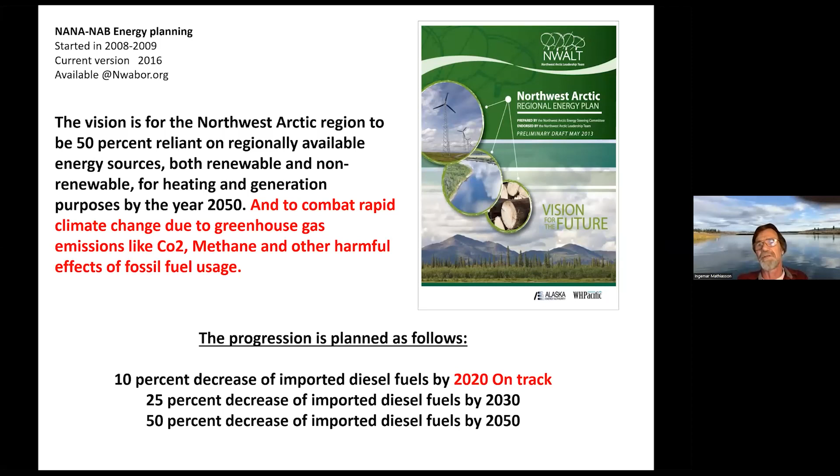The Northwest Arctic has decided that we needed, since 2008, to start developing all available energy sources that are local, both renewable and non-renewable. We're looking at both, and definitely goes towards renewables, as we also added to combat the rapid climate change and greenhouse gas emissions since about 2016, when we changed the plan slightly. So we've been doing about 10% decrease of imported diesels, and is on track now for possibly 25% by 2030, aiming for 50% by 2050.

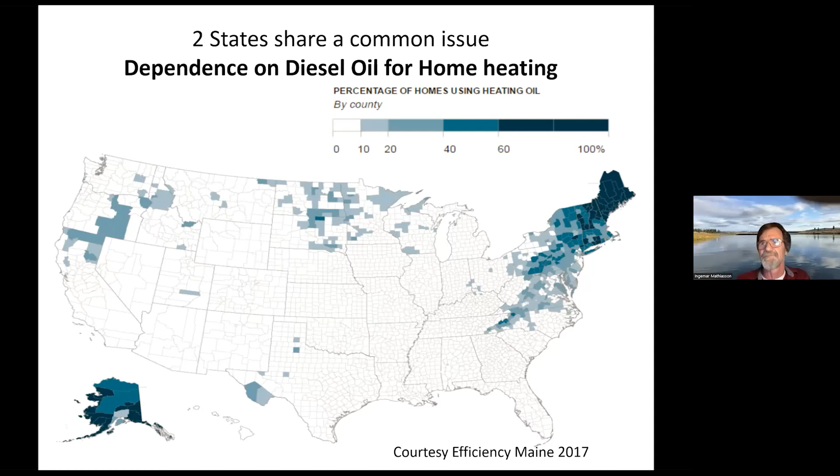Alternate energy harvest time is available. Since we started our solar arrays up in the Arctic, we found that the heat pump harvest time is the same as the solar harvest time. In the Arctic, we harvest when the energy is there—caribou, berries, energy, wind—we go after it as a harvest season. And that's how we started our solar arrays.

We realized we could do 3 or 4 or 5 months in the year, so why not do it and see what the impact would be? So the harvest season for heat pumps is the same. Above zero, they have a fairly high, decent COP, but below zero, there are very few heat pumps that work effectively. So implementing heat pumps above zero during the harvest time was what we were aiming for—up to 6 months a year, can we use heat pumps?

So we looked at different numbers. The COPs to even break even for diesel displacement were approximately 2.4, 2.4, 2.3 for different kinds of equipment versus a heat pump. This is also dependent on the fuel cost being the same when you look at that COP, and it's not the same. For households, it's much more expensive to heat their house than it is to produce the electricity, so that makes a big difference when we're running the heat pump calculators.

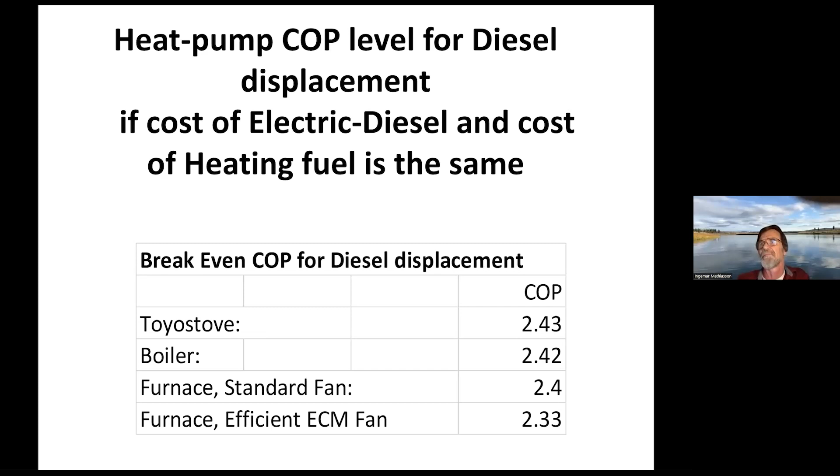Over in Maine, back in 2016-17, we had already seen that they were doing really well implementing heat pumps everywhere, even down to 27 below in some cases. They are not that different from Alaska, so we knew that what they were doing looked good.

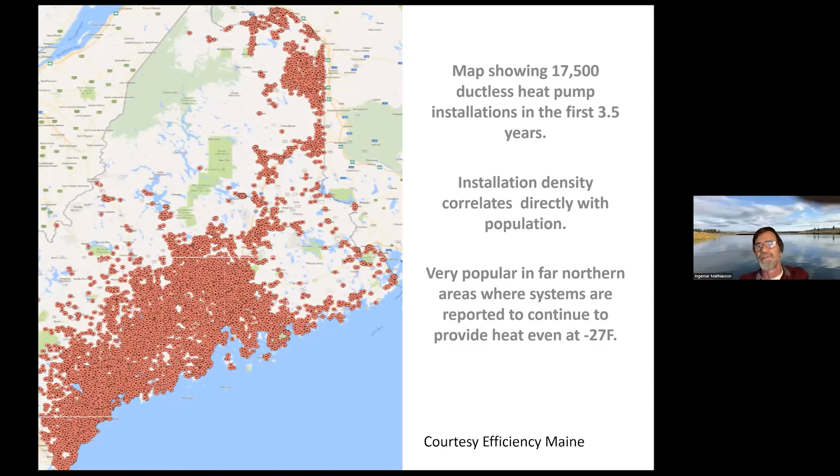We looked at the advantages: low-cost heat, similar to heating with natural gas or wood, typically half the cost of heating with oil, kerosene, electric baseboard, or propane. To compare heating costs of different heating systems—low-cost air conditioning, of course.

Up in Shungnak, when we put up a heat pump, somebody accused me of giving air conditioning to the Eskimos. Well, everybody liked it, actually. The summer gets pretty hot up in Shungnak, so that was an added bonus.

And the comfort of having heat pumps and safety—air quality in particular gets a whole lot better if you are supplementing with biomass wood. The filters in the heat pumps can be set just to circulate the air and filter it if the heat pump is not used for anything else, getting cleaner air inside the house when people are using wood stoves. And of course, no CO2 emissions if we can go on electricity generated by alternate energy.

So we did 13 installations in 2016.

There was some advantage to having heat pumps, like a guy up in Kiana decided. He put a little cooling tent outside once he figured out that he was cooling down the outside of his house. He put this up when he was hunting and sucked the heat out of the meat and heated his house with it, and got a nice little cooling effect at the same time.

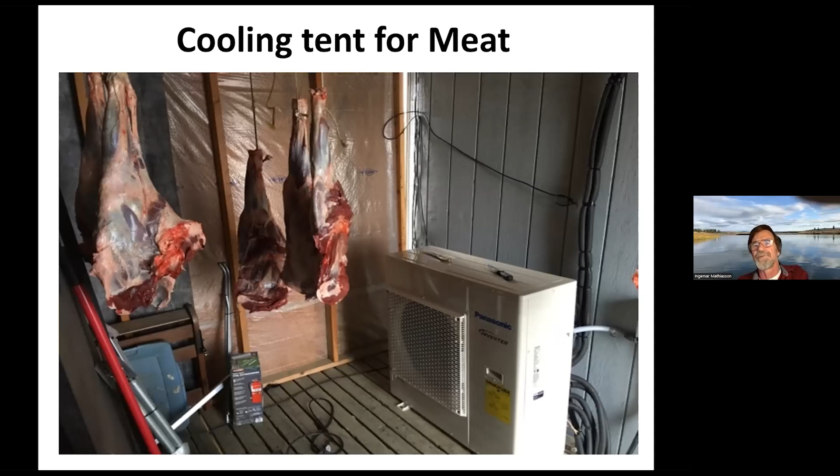Here's some results that are of interest. As somebody goes out of PCE, the actual cost is going to increase. This ends up being a blended rate. The stove oil here was $9.50 a gallon. October was heated by the equivalent of 11 gallons, but they've used 25 gallons to produce the same amount of kilowatt hours.

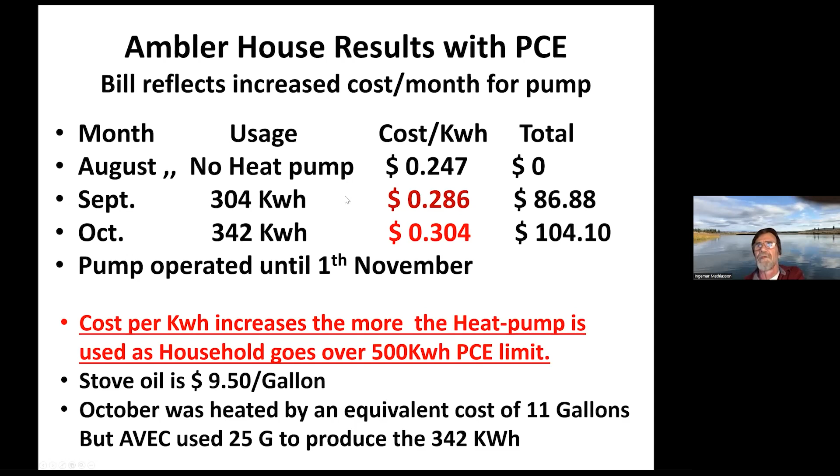So we looked at untapped PCE, what's available out there. In our region in 2016, we had about $1.1 million sitting there that wasn't used, and our community buildings was about 830,000. So we saw right away that there was enough to add some heat pumps in there, and they could effectively take care of that PCE and keep the rates somewhat decent, not too high for the households.

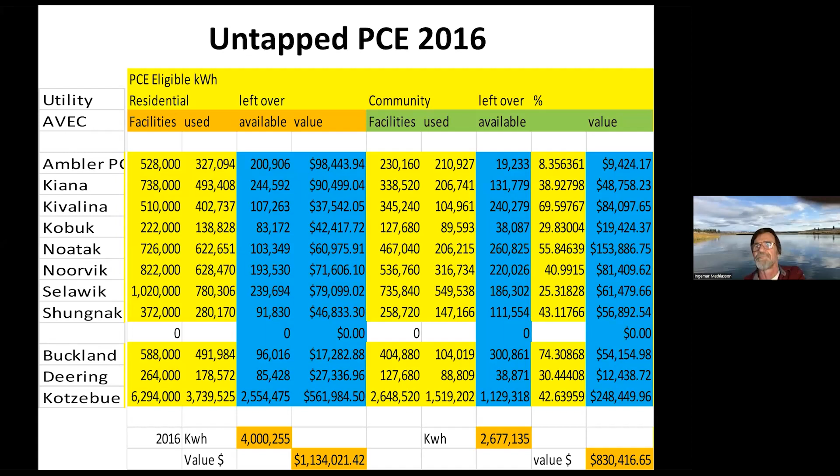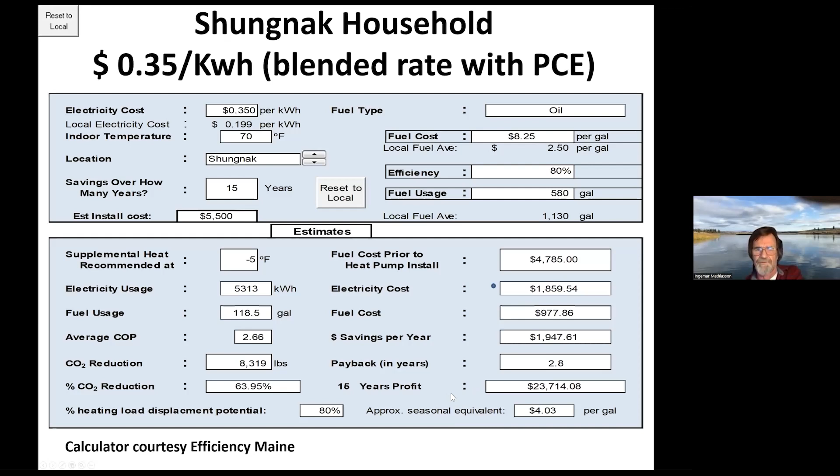The profit would be $23,000 after 15 years, with the blended 35-cent rate. So what happens with the full rate? At that time, the rate in Shungnak was 60 cents. So at that point they still had a saving of $838 a year, but it was getting closer to break even. Still a slight saving due to the high difference between the fuel cost of $8.25 at that time - now it's $10 up in Shungnak - and the actual cost for AVEC's generation of electricity.

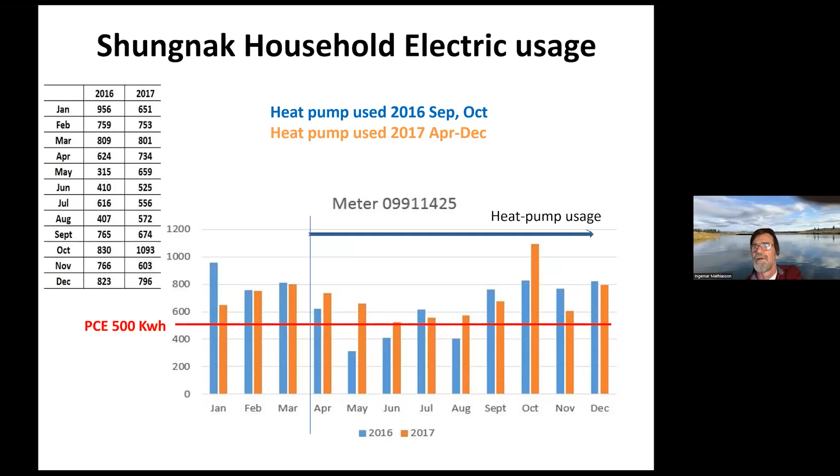The household electric, we just looked at where it's in use. We have the PCE line. 2017 is with the heat pumps, and the household uses more during shoulder months using the heat pump. However, looking at 3 years in a row - 2015, '16, '17 - what the household was using didn't change a whole lot. Between 2016 and '17, adding the heat pump as they were turning off other appliances didn't change the whole thing. Of course, there are environmental factors in all this - it's not a very accurate show of what's actually happening, but it doesn't increase the household's electricity use very much when they're switching from one appliance to another.

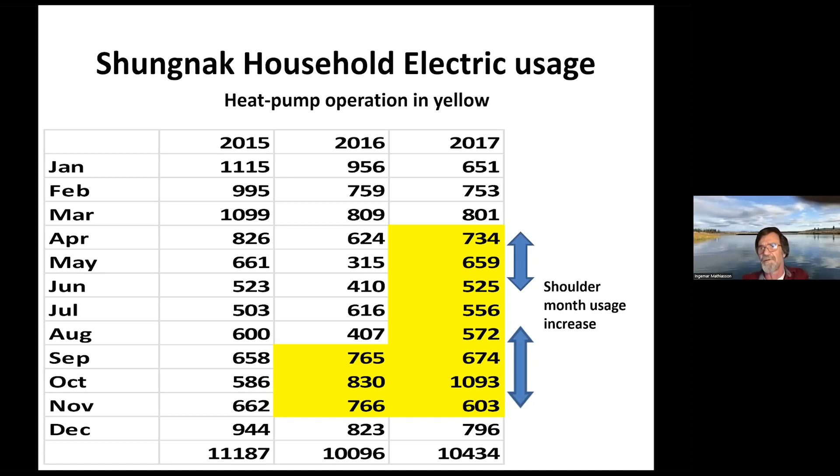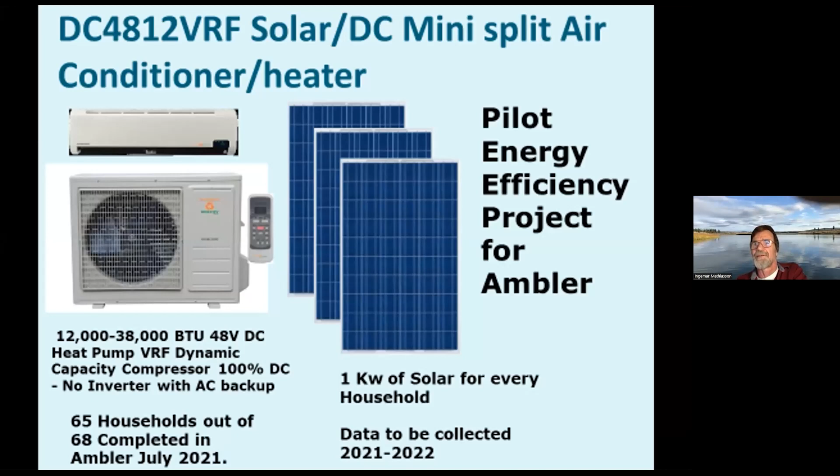With the solar powered heat pump, we have 68 households now running in Ambler with solar power, and they know when it gets nice and sunny out, they get this little green mark on it. They can run fully on solar and don't take anything from the grid for these additional heat pumps. We decided to do it this way as we knew that putting Mitsubishis in 68 households would strain the grid, so we wanted to try it and see how people like it. It's been very positive, people really like the pumps, and we'll collect data all year on it.

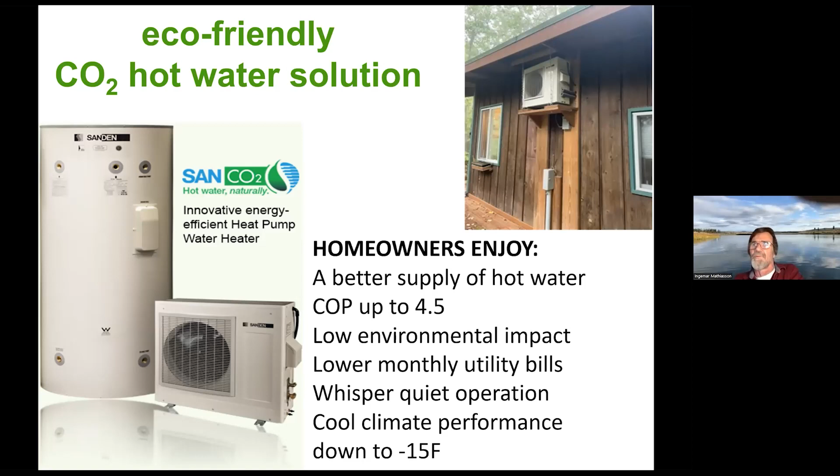This one I'm testing out in a couple of places. I'll go a little faster to get to the end. We have a hydroponic van up in Kotzebue that's powered by that together with solar, and they did really well through January of 2020.

To that, we've added the Shungnak solar power IPP up in Shungnak, and they now go diesel-off almost every day between 4 and 7 hours, probably up to 10 when it's available. During the summer, and for the next 4 or 5 months, they'd be a perfect candidate to add Mitsubishi heat pumps to the community, running off that alternate energy and offsetting even more diesel fuel during those 6 months when the solar is running.

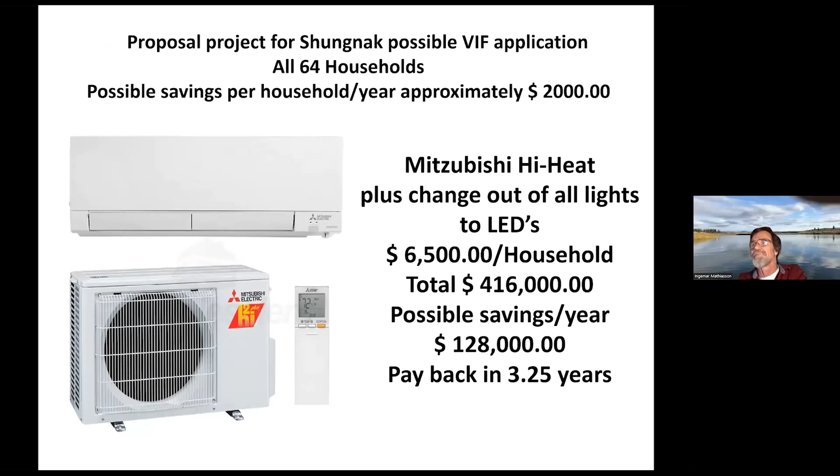So I know I've gone a little over, so I'll finish with the last one here: it's not the strongest that survives, it's the one that is most adaptable to change that survives. So that's what I got.

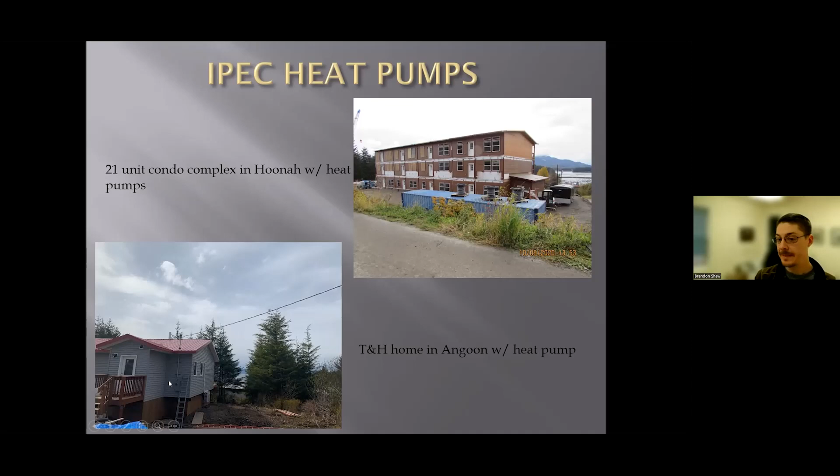A little background: IPEC's generation is currently a mix of run-of-river hydro as well as diesel generation. Due to the islanded nature of IPEC's communities and the variability of our hydro resources, IPEC was initially concerned about being prepared for peak loads and the demands heat pumps would place on the system during the coldest days of winter, which is also likely when hydro production is very low. During these times, load is likely served nearly 100% by diesel generation, and we do not want loading issues on these islanded systems.

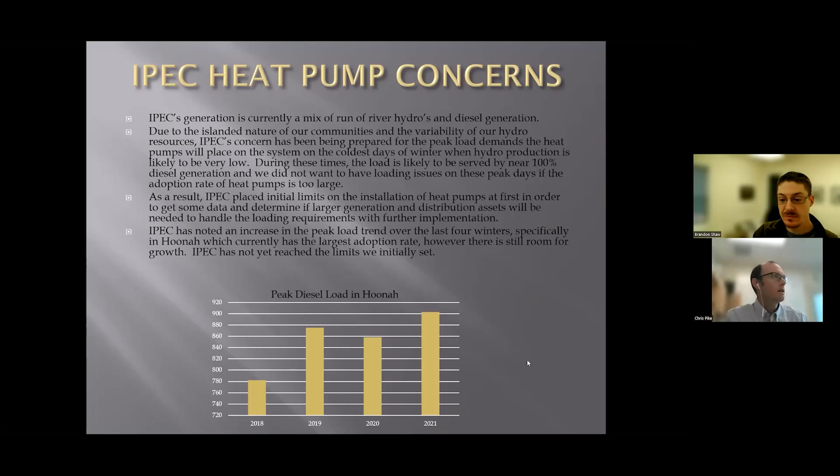Do the homes in the communities where heat pumps have been installed typically maintain a backup fuel source, or how does that work? Typically, they are maintaining some sort of backup heating source. In some cases it's resistive electric heat, which, as we've discussed earlier, is not always the most efficient. There's still a lot of wood heat use in our communities here in Southeast, so it's a combination of wood heat. I'm not aware of anybody running backup monitor oil heaters or anything in these new installations. We're trying to get away from that—at least TNH is kind of pushing to get away from that.

And have most of the heat pumps been installed in new construction, or have people retrofitted older buildings as well? There has been some retrofits, again spearheaded by TNH Housing, but they have retrofitted some. Okay, and so those older buildings would typically have the wood stoves and that kind of thing they would use for backup heat? Yep.

Can you talk a little bit about how you guys determined how many heat pumps you wanted to start with as that upper level boundary in each village? How is that number determined? We worked closely with Michelle and ACEP to look at what our peak loads were in each of the communities and what our capacity was for generation in the communities, and what kind of wiggle room we had in between. We set a number, and the number is different for each community—higher in some, lower in others. But we have a ways to go before we reach our peak in any of the communities, so we're looking forward to bringing more heat pumps on.

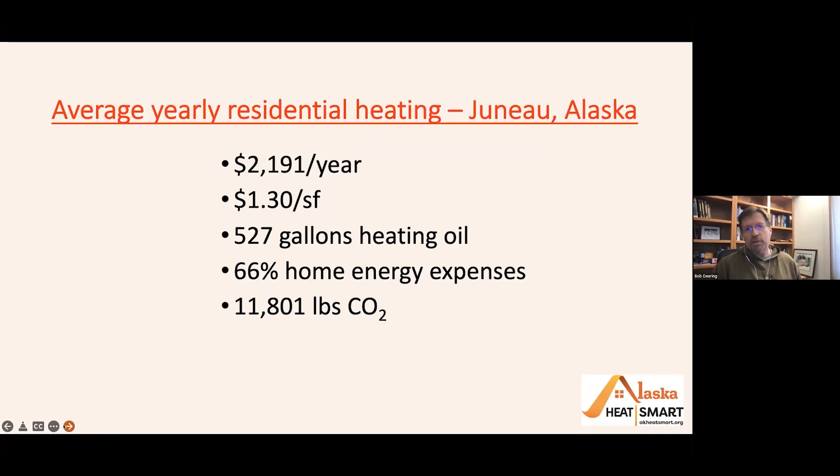That's what average yearly residential heating looks like in Juneau for the average house, and these are the numbers we're trying to drive down with our work. Like Chris said, we're trying to transform residential heating at a community scale. We're not a research organization, we're not trying to be on the bleeding edge of any technology. Our real focus is trying to do standard heat pump technology at the greatest number of houses in Juneau that we can.

A little bit about Juneau. Looks like my lettering, my words are covered up by our video.

The population here is about 32,000, except when the cruise ships are in, then it's about 52,000. We're the capital of Alaska.

Juneau's not accessible by the road system. You can fly in here, you can take water. Don't try driving, that won't help.

We're 100% hydropower, and we're really blessed with that. Our electric utility rate's about 12 cents a kilowatt hour in the winter, and we've got a lot of capacity for growth, so as we electrify Juneau, our utility can keep up with things.

We do not have natural gas. We don't have coal. We're looking at mostly heating oil and electricity, some wood heating.

We're considered Northern Maritime Pacific climate. Temperatures are in the 20s to 30s, typically in the winter. So we're really mild by other Alaska standards.

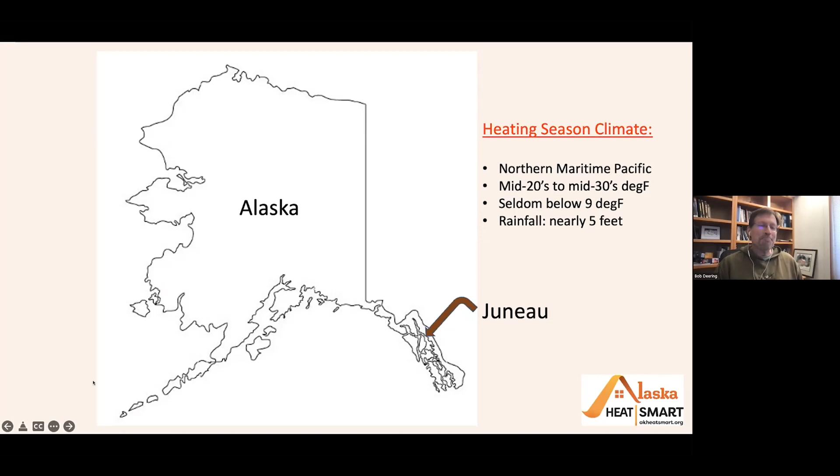Alaska's a big place. Our area of focus is pretty much on residential heating, single family housing. Mostly we're talking about existing stock, and we're retrofitting houses.

There's a lot of heat pumps going into new housing, but that's not really the focus of Alaska Heat Smart. We're working with folks to retrofit their houses. So far, we've worked with about 500 households in Juneau.

Profile on our houses, most of them are built before 1990 — there was a big boom in houses when the Alaska pipeline came in and all that money came into Juneau. What we're looking at is about 10,000 units, and that's single family housing, anything from mobile homes to some townhouses and condos included in that number.

The efficiency in Juneau houses is not generally that great. New houses with new building standards are much better, and we can see that in the data as we look at energy usage. But overall, it's pretty moderate.

The old houses in Juneau, the historic ones built in 1915, unless they've had a bunch of retrofit work on energy efficiency, are leaky houses that probably don't have any insulation. They really eat the energy.

It's mostly heating oil, like I mentioned earlier, hydronic boilers or forced air furnaces. Some people are putting in little Toyo stoves too, which are unit heaters — I'm assuming most people are familiar with those.

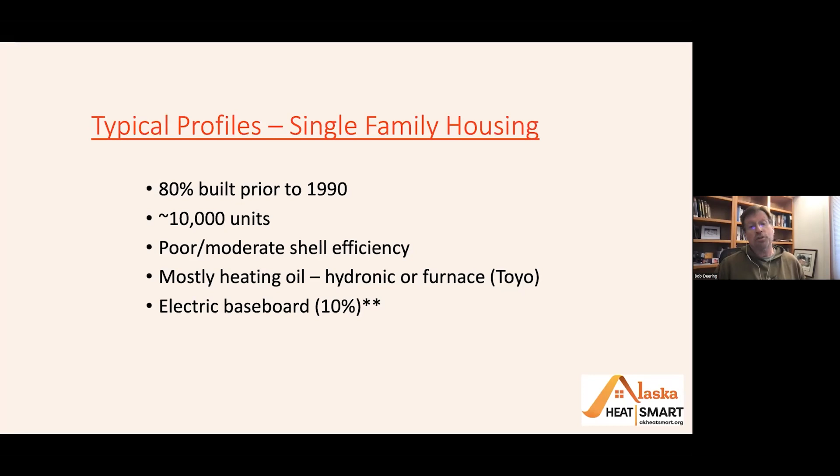These units are compatible with our climate. They're generally rated down to 10 or 15 below zero, and we rarely reach that point. But if we're going to hit 10 or 15 below zero, the heat pumps aren't putting out a lot of heat, so typically we need a supplemental backup heating system in these houses as well.

Outputs are 9,000 to 36,000 BTUs, and that ranges pretty closely to what the heating usage is in most Juneau houses. Some houses are a bit above that, but this covers a big chunk of the heating demand in most houses. What we generally find is that single head heat pumps are the biggest bang for the buck for your installation costs, but in some houses it's appropriate to put in multi-head systems or ducted systems.

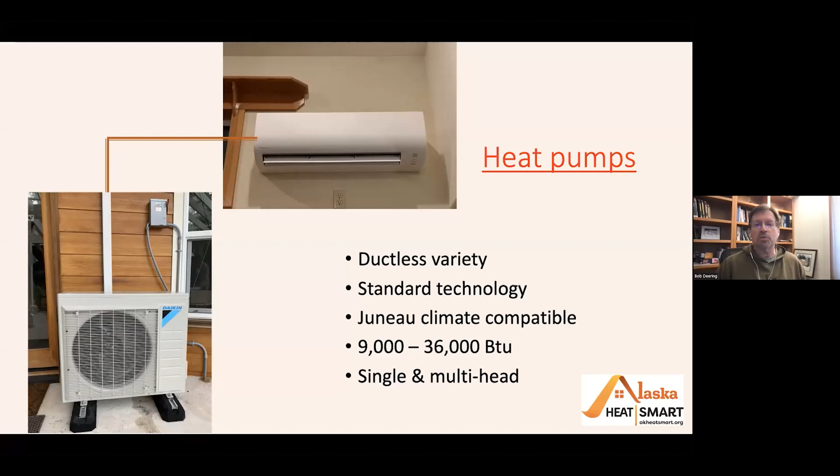What our function is in this process is we're really consultants. We're providing consultation services to homeowners. Heat pumps are kind of a black box for a lot of people. They don't understand how the technology works. They don't understand the appropriate utilization in their homes.

When you buy a car, you know what a car does. It's got four wheels, you get in, you drive it. With a heat pump, it's not quite as clear for people, but yet it's a pretty substantial investment. You're looking at anything from $7,000–8,000 to maybe over $20,000.

What we do is, number one, folks apply for a consultation or assessment from us. They get on our website, they do an application, they provide their energy usage history. How much oil have you burned? Are you burning wood? That kind of information. They give us information on their houses as well.

AEL&P provides us with the electric use history in a spreadsheet, so that takes that burden off the homeowner. We do an individual site visit to the houses. We visit with the folks, we look around their house, we talk to them.

I noted COVID in my notes there. That was a little wrinkle we had to deal with, especially during the height of COVID. We were doing some of our site visits remotely, which is much tougher to do without seeing the floor plan of the house. Typically now we require everybody wears a mask when we visit, and we ask the homeowners to do the same.

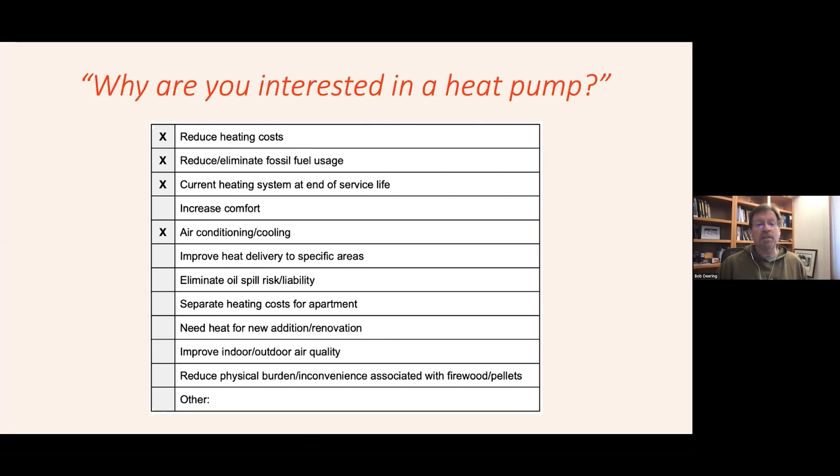Occasionally we run into older folks where the burden of collecting firewood and hauling it inside is becoming untenable. It's not uncommon for the guy who goes out and cuts his own firewood to have his wife step in and say, no more, you can't come hobbling into the house anymore, get a heat pump.

Once we do the site visit, what we're looking at is the floor plan. We get a tour of their floor plan to get a sense of how heat is going to move throughout the house from a heat pump. We look at their existing heating systems. We look at their electrical systems as well. And probably most importantly, we have a conversation one-on-one with these folks, and we talk about those goals.

We educate them about heat pumps, kind of take some of that black box-ness out of the equation. We talk about different options that we might have. We answer a lot of the questions that folks are going to have, and we help guide them through the next steps for getting quotes and installing heat pumps.

When we do the analysis, we're taking that energy history the folks provided, the electricity information we got from the utility, and plugging in some site observations that we gathered while visiting those folks. We can generate multiple different scenarios. If you put a single head heat pump in, or a multi-head heat pump in, what do the costs look like? What are the benefits going to look like for you? What are the capital expenses?

We again run this through the model that I talked about earlier, and the outputs give us what their annual savings would be, what the simple payback would be, and how many years it would take for this heat pump to pay for itself with the savings.

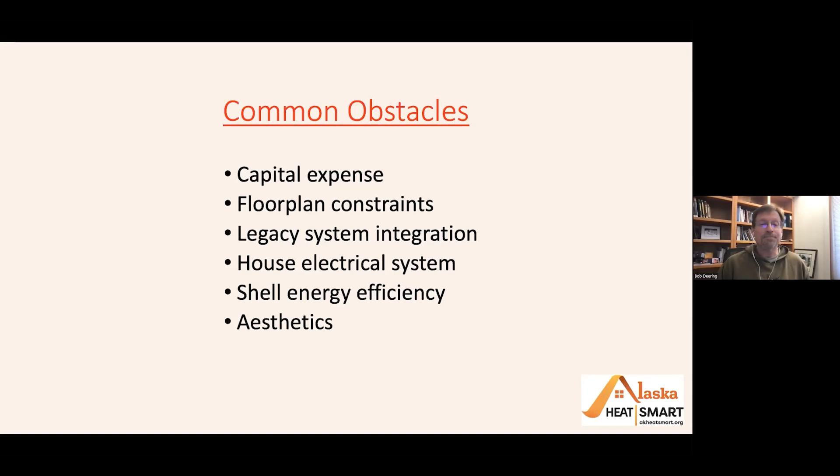Hey Bob, just a quick time check, you've got about 2 minutes. Two minutes, holy cow, okay.

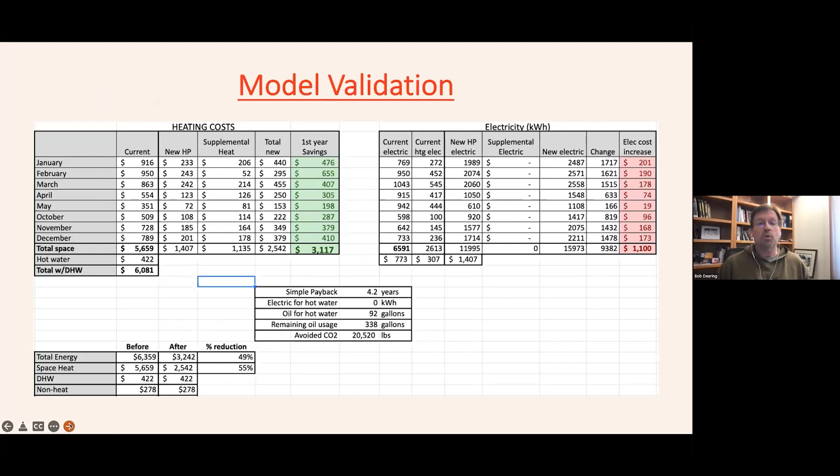Some of the challenges we run into are with validating our model. A lot of this is still based on assumptions. We're just starting to go back to houses that have installed heat pumps so we can use that data to validate and see how our model is actually performing. So far, the few validations we've looked at show the model working really well, we're less than 10% off. I don't believe that's going to be the case for much longer. Workforce, equipment, and supply chain are all challenges for us.

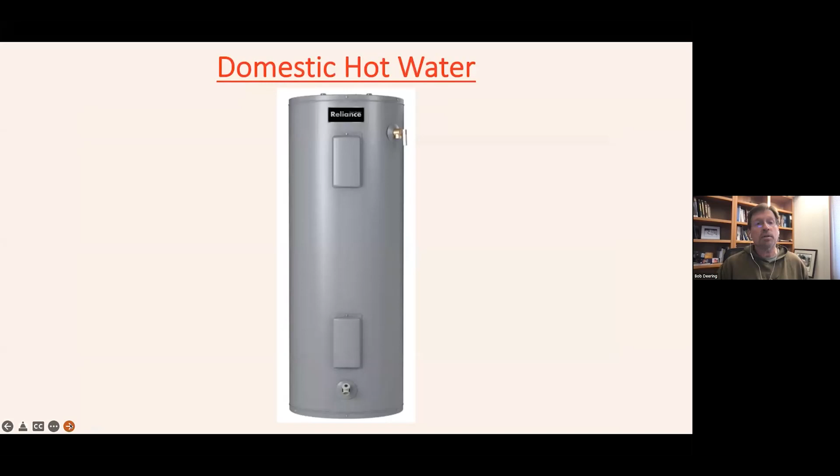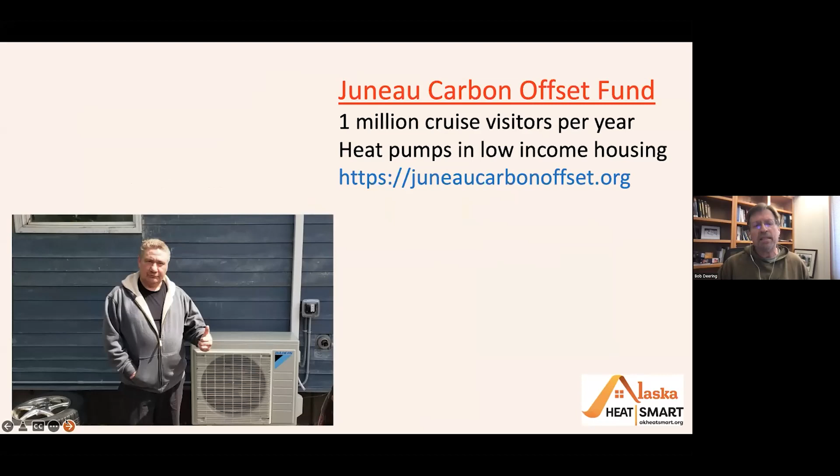And I think I'll jump through the rest of these for the sake of time, but we have a number of spin-off activities that have come from our efforts that we're really excited about.

There we go. Andy Romanoff is our executive director, by the way. Thanks, Chris. That was wonderful. Thanks, Bob. And I really look forward to maybe touching on some of those final things in the Q&A if we have time.

We will move on to our final presenter for this panel, and it's someone everybody knows very well already. And I think the fact that she's presenting on this panel also speaks to her talents as a researcher. Michelle Wilber is a research engineer, and she's my colleague here at ACEP. She leads the Beneficial and Equitable Electrification Initiative. She has a bachelor's in astronomy from Caltech and a master's in mechanical engineering from UAA. She grew up in Alaska, and she says that she's thrilled to do work that she hopes will continue to make Alaska a great place. And she's here to talk to us about electric vehicles.

Take it away, Michelle. Well, switching over to a presenter hat, this is the early adopter panel, not the researcher panel, but looking at what we know about electric vehicles in Alaska. I thought I would present on what we are compiling here at ACEP, because we are really looking at the early adopters for electric vehicles in the state and trying to capture that information, anecdotal and data-wise and everything. So there's a couple of pioneers on my opening screen.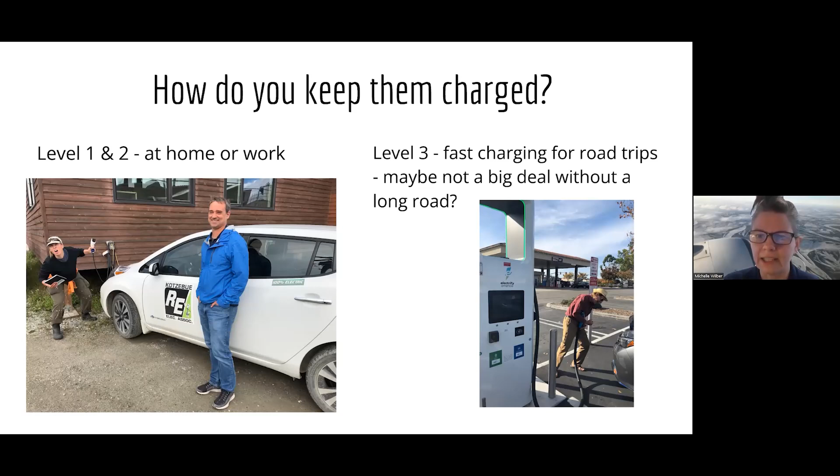The large level 3 special fast chargers are being installed in California—this is my stepfather goofing around with a big heavy cable to charge his electric vehicle there. Those are appropriate in many conditions, anywhere people need to charge quickly, like taxi cabs might need to in Bethel in the middle of their day, or on the road system. I won't go into that too deeply.

One of the big questions that comes up is how well these vehicles work in winter. This is really where the early adopters in the state come in, because people have been adopting electric cars in cold places. There are a number of battery electric vehicles in Fairbanks, which gets quite cold in the interior. There's the Kotzebue electric Leaf that we have information on, and there's a school bus in Tok. So we can collect data, and it does seem that the majority of these vehicles are running well all through the winter—they might need to stay plugged in or parked somewhere warm to keep them ready to go.

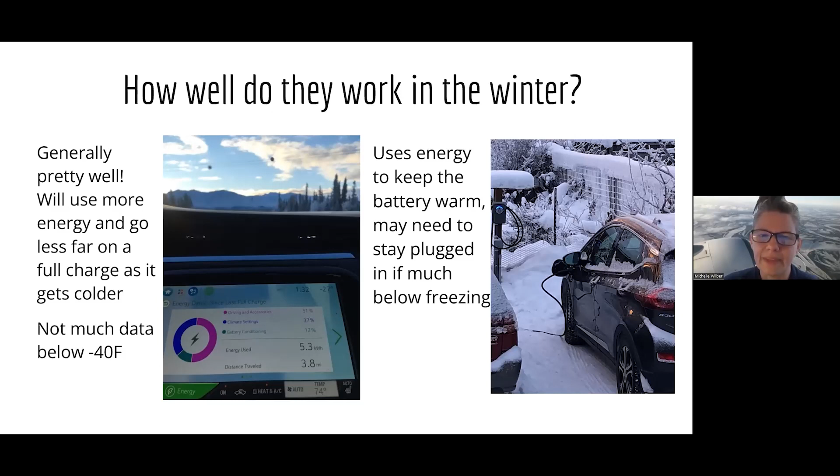It may be that keeping the 12 volt starter battery warm is one of the more important things, not in the same way you'd need to with a gas vehicle, because the battery that keeps the vehicle moving generally has a system to keep it at a happy temperature when not in use, as long as it has a power source while it's running down. So as far as being stranded in the cold, as long as you have a place to plug in or a warm place to park—and we realize a warm place to park is a luxury many Alaskans don't have—you can keep them running even at -40 Fahrenheit and below.

Another big question, especially if you're on a diesel microgrid, is are they really saving fuel? If you do the math: a diesel generator uses a gallon of diesel to create somewhere between 13 and 15 kilowatt hours of power. Looking at how many miles an electric battery car can go per kilowatt hour—and that rating is usually for summer use, since they use more electricity in winter to keep the battery and the people inside warm—you're looking at a pretty good fuel efficiency, peaking around 54 miles per gallon, though most cars in communities aren't getting that.

In winter they need to use a lot more electricity to stay warm, so that efficiency drops. This 29 miles per gallon figure is actually the high end, because they're also using some power while parked, just like a gas vehicle might need to idle or stay plugged in while parked, using additional energy. But again, it's not a horrible thing, as some might think, trying to change diesel into electricity and then back into moving a car again.

Whether they save money or save climate emissions really depends on their use, and we've created a calculator you can access at the site listed on this slide, to help you figure out if they might work well in your situation—how far you have to drive, and the community you live in in Alaska. The calculator is a bit of an energy nerd calculator; it does ask for some information you might not know, but you can choose defaults there.

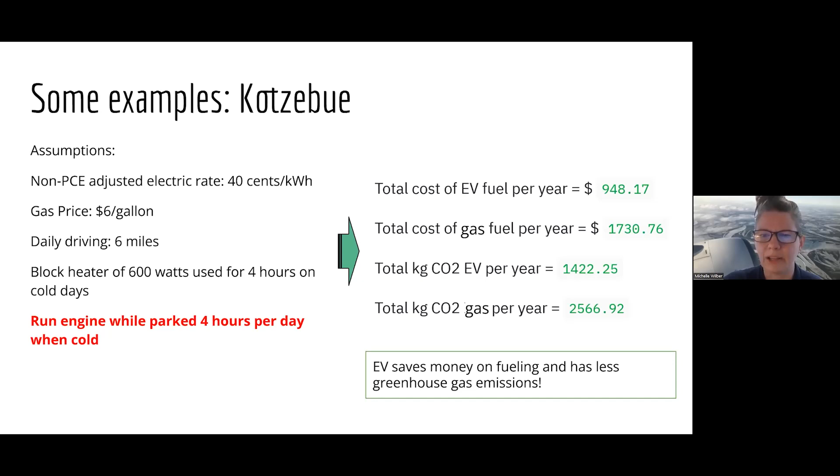However, there are a lot of people that don't use a timer on their block heater and idle the car a lot to keep it warm when it's cold. In those cases, you're actually saving a lot of money and greenhouse gas emissions with the EV, being used the same way in both cases, plugged in a lot when it's not being used to keep it warm and ready to go. So that usage can really matter.

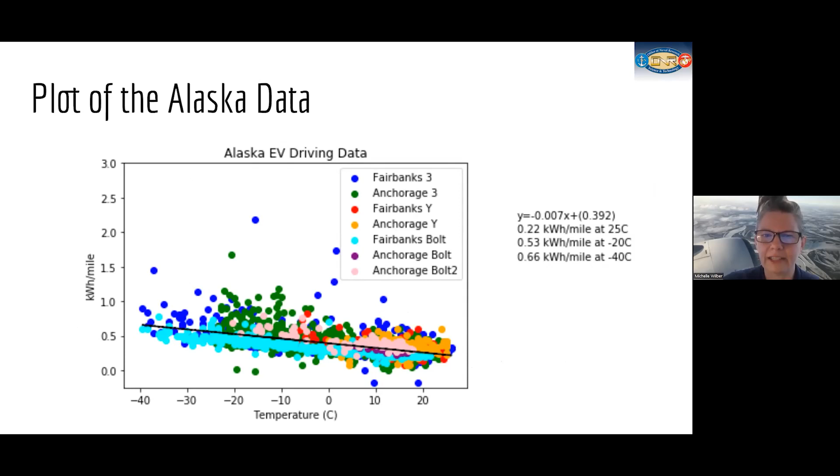The back end of the calculator is all the data we've been crowdsourcing or gathering from people who are willing to share their data with us that have vehicles in Alaska. We've fit a linear trend to the energy it takes to drive them depending on temperature, which seems to be pretty linear between -40 Celsius or Fahrenheit and summer temperatures.

Using a year's worth of data from my own vehicle, a Chevy Bolt in Anchorage, which doesn't get as cold as the vehicles seen in Fairbanks, it looks like we were maybe a little generous in letting it not use very much energy in the calculator when it's parked. But we're still trying to figure that out — that's a research thing to continue looking at different vehicles and analyzing.

We're also looking at big vehicles. MOA has a box truck and Tok has a bus. I realize I'm out of time, so I'll wrap up quickly. Those larger vehicles are using even more energy to drive, especially the bus, which has to keep the whole inside warm enough for the kids, using electricity to do so. It doesn't have a separate propane or fuel heater in it.

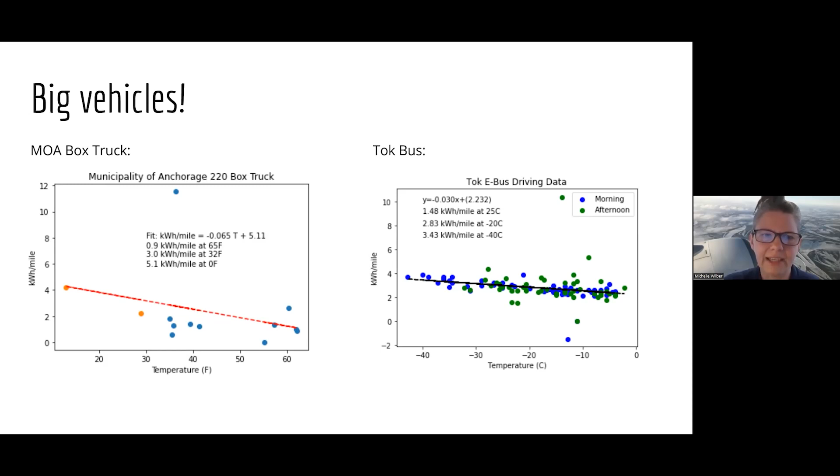So that one definitely has a steeper trend of using more energy as it gets colder out, but it's still able to drive all season long. Both of these vehicles park in a heated garage or space, but that's because the diesel vehicles they're replacing also needed that to operate, or for other reasons — it isn't just for the EV. So they're able to take advantage of parking in a warm place and then just driving in the cold.

But they're working fine — we're still gathering information, so we have a bunch more crowdsourced data to analyze and verify and compare. We have some interns this summer to look at it, so we're very excited to continue to tease out what we're learning from these early adopters, and especially as different vehicle types come out, what that means for affordability and applicability in different situations in Alaska. Thank you very much for your attention.

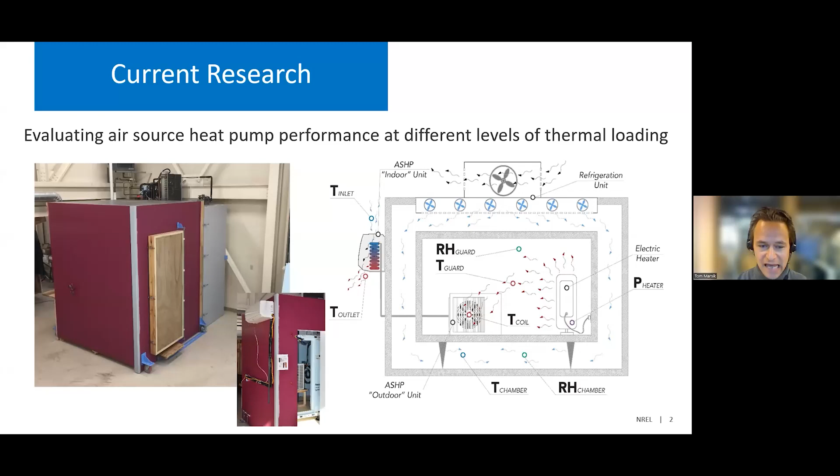The second project I want to highlight is a collaboration between the National Renewable Energy Lab and the Oak Ridge National Lab. Here at the Cold Climate Housing Research Center, we are doing basically field validation of a cold climate heat pump prototype developed by the Oak Ridge National Lab. So we are taking advantage of the cold climate conditions here in Fairbanks, Alaska, to evaluate the performance of this heat pump prototype.

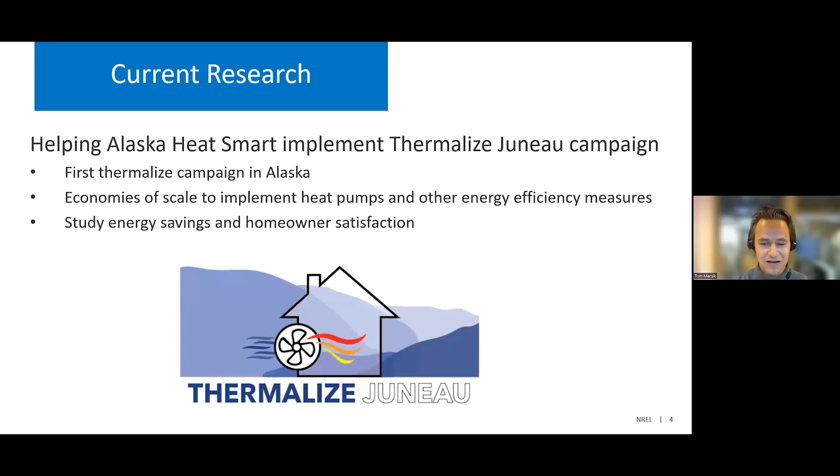And the third project I want to highlight is a project in which we are helping Alaska Heat Smart implement the Thermalize Juneau campaign. It's a campaign that's taking advantage of the economies of scale to implement heat pumps and other energy efficiency measures, and along the way we are studying the impact. So this was just a very quick overview for those of you who were wondering what's happening at the Cold Climate Housing Research Center with respect to air-to-air heat pumps. I'm going to skip questions because I really want to make sure we have enough time for our speakers.

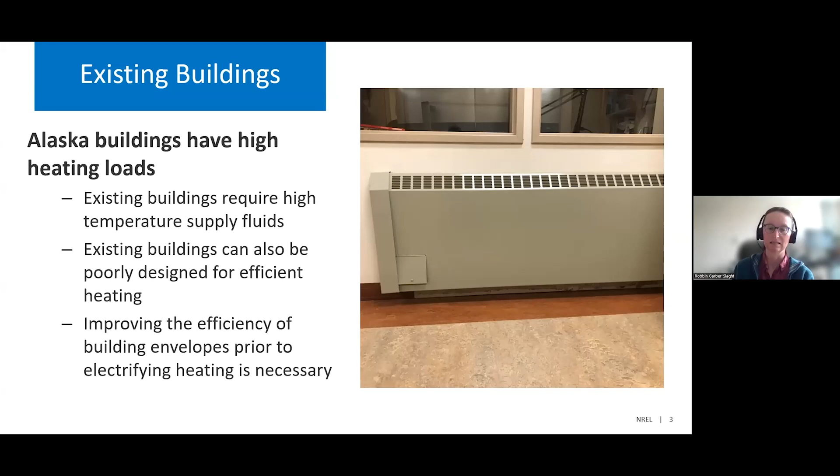So I'm supposed to talk about cutting edge technology or cutting edge research. I will say heat pumps are not cutting edge - I think Bob already said he's not an early adopter. They have thousands of heat pumps in Southeast. Heat pumps have been around - in fact, I find it really entertaining, my parents had a heat pump. We built a new house in 1995 and had a heat pump. When people say to me, oh, heat pumps are new technology, I'm like, really? My parents were ahead of it? I don't think so, they've been around a long time. But heat pumps for extreme cold climates are pretty cutting edge.

Air-to-air heat pumps, I think everyone has touched on this. They really cannot be the sole heating source for most locations in Alaska. They lose efficiency and they also lose capacity as temperature gets colder. So the colder it gets, the less heat they can produce, which is kind of backwards to how Alaska works. The colder it gets, the more heat you need. So there's a big disconnect with air source heat pumps and the actual heat load that you need.

I think Ingemar inferred that they're turning off the heat pumps in Kotzebue in November, which makes sense. They don't have a lot of solar starting in November, so they don't really have the offset for electricity. But it's also cold, and the colder it gets, the less efficient those units are.

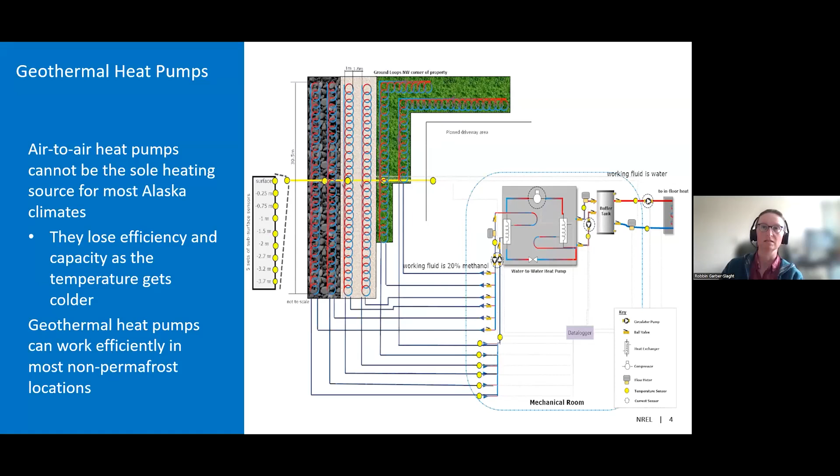The temperature coming from our ground loop is right around 0 Celsius, 32 degrees Fahrenheit. By the end of the season it's coming in just under freezing, and it actually returns to the ground at like 2 below Celsius, about 28 Fahrenheit. It's a pretty significant extraction of heat. But what's happening is we're actually freezing the soils - we're extracting energy from the phase change of taking the really wet soil and freezing it. So far we haven't really created permanently frozen soil, every year it thaws in the summer. That's probably because of the groundwater on site.

The lessons I've learned just working with this one heat pump system since 2012: first of all, install costs are pretty high for a ground source heat pump. This one was actually much higher - it's been a few years since I looked at costs, but it's on the order of $30,000 to install a ground loop and a heat pump.

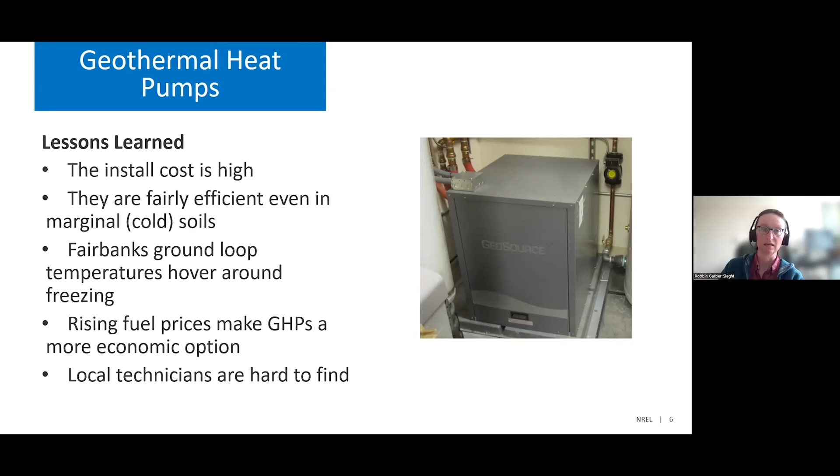Well, thank you very much, Robbie. That's a great message. So when we talk about heat pumps, let's not forget about the building envelope and making the building envelope more efficient, because at the end we can achieve the highest savings with a systems approach. I love that message.

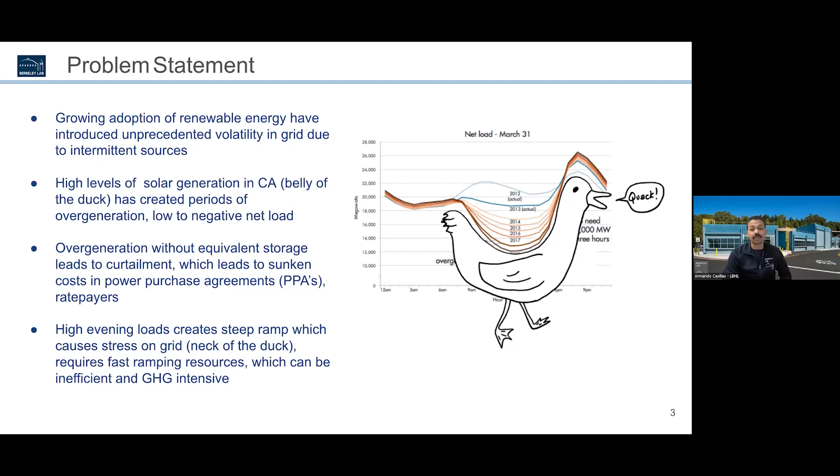In addition, evening hours see the reduction of this generation source and introduce a steep increase in net load, which increases the stress on the grid and can introduce carbon-intensive power generation with peaker plants that use natural gas in California, all emitting greenhouse gases.

If you think about it, I like to call it the four horsemen of building energy consumption. We have a lot of places in the U.S. that have to condition the space for excessive heat. In Alaska, you have excessive cold. You also have humidity that HVAC systems need to take care of. And most recently, we've been focusing on keeping the air that occupants in buildings breathe clean - low CO2 levels, PM 2.5 especially in California with all the wildfires, and airborne pathogens with COVID recently.

The recent push for electrification of gas-fueled loads, with heat pumps that we're talking about today, will only increase the stress on the grid, given that we're now shifting all of that over to electricity. Traditionally in California, at least, we've seen a big peak in HVAC load in the summer for cooling, but we will start to see that as well in the wintertime as we electrify those loads.

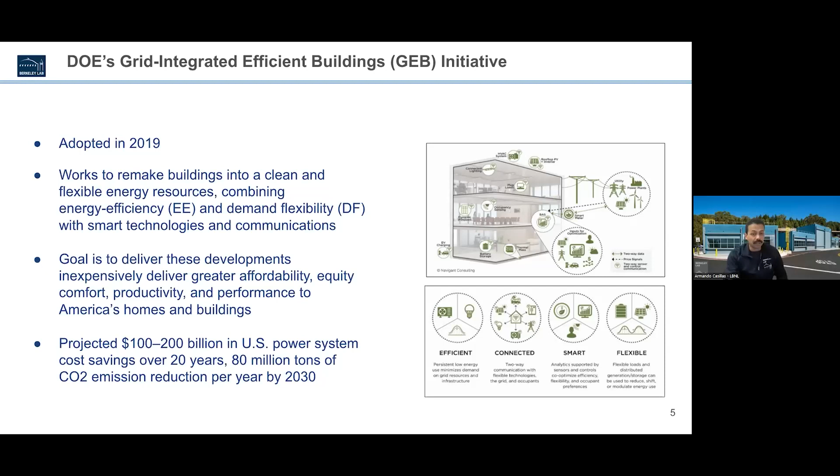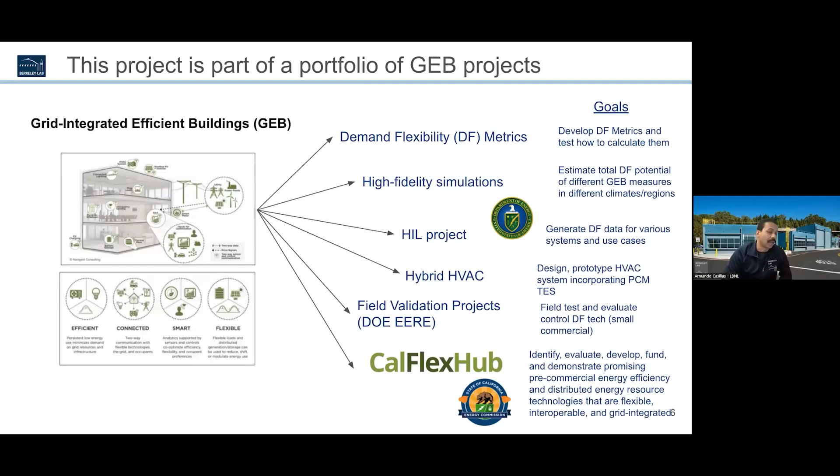This makes it a pretty high priority in our work here at the lab, promoting DOE's vision. So from this concept, I can start talking about some of the work our team does. We have a big portfolio of projects that covers different aspects of this GEB initiative, and I'll quickly dive into them.

In terms of how HVAC systems play a role in this, in particular heat pumps that we're talking about today, HVAC systems can provide demand flexibility in a number of forms. In addition to predominantly being the highest load in most commercial and residential buildings, they are one of the only systems that actually move. Buildings are these sort of static things, but we have these components that are constantly moving, and we can take advantage of that for flexibility.

This involves a lot of controls programming, however, the knowledge which I'm personally getting better at, and our team in general is focusing on developing optimized controls to take advantage of the flexibility these systems can provide and optimize it for different objectives.

So I talked a little bit about the modeling that our team does and the building technologies and urban systems. One of the main ways buildings... give me one second. But most of our work at BTUS is carried out in two different ways, one of which is through modeling.

Modeling is an integral part of our workflows, at least mine, and allows us to perform parametric analysis on the effects of different strategies on whole building energy consumption. It has allowed us most recently to take advantage of higher fidelity modeling via the Modelica modeling language to perform a controls-oriented simulation to determine optimal ways of controlling our building systems.

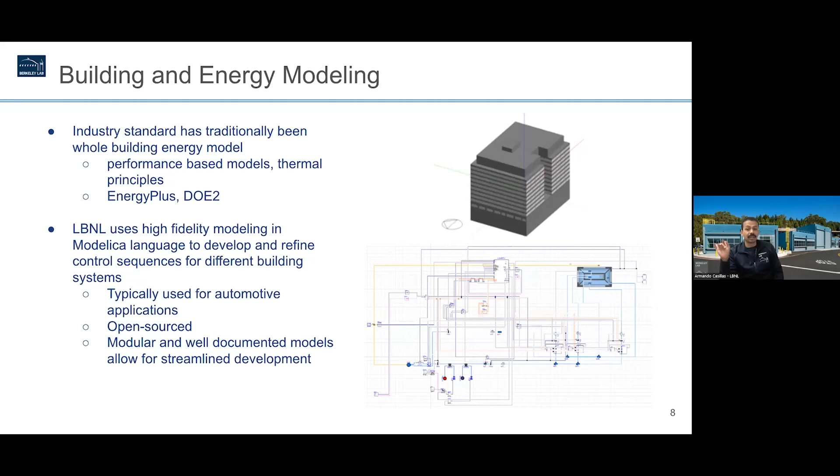So although I think modeling can be fun and pretty rewarding, I would say it's definitely not as fun as working in our experimental facilities. So the other way our work is carried out is via our state-of-the-art experimental facility called FlexLab.

So you see here, FlexLab is behind me in my virtual background, as well as in the picture here. FlexLab is our state-of-the-art facility and includes customizable spaces and HVAC systems to test out a large number of different combinations of systems.

FlexLab experimentation allows us to carry out lifelike experimental designs, taking into account envelope construction, occupancy patterns, and highly granular measurements of environmental conditions, including occupant comfort. All of our data is measured, collected, and visualized, which better helps us paint a picture of our test results and takeaways to relevant stakeholders.

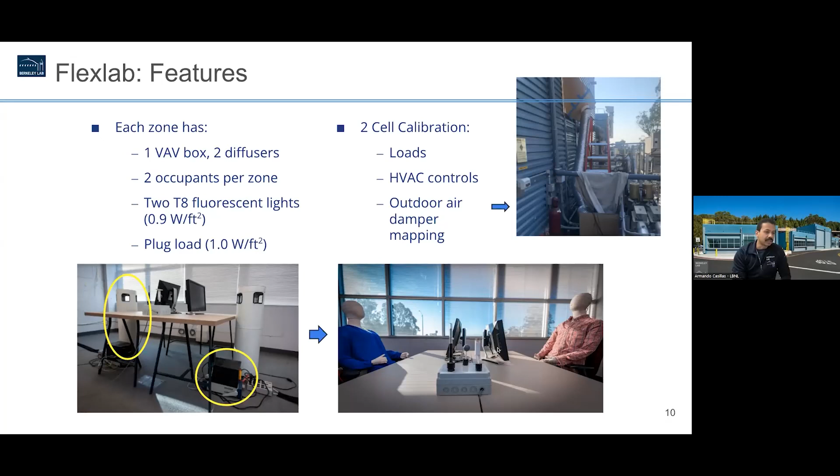And you see here as well, we have the thermal comfort stations that we use to develop comfort metrics during our experiments. This is just an example of one of the experiments we've carried out, called Hardware in the Loop, where we are actually developing a test setup for heat pump controls, which I'll go over in a little bit.

This is the standard side-by-side sort of setup we have at FlexLab. The beauty about FlexLab is we have these two identical cells right next to each other. We can run a control scenario in one cell, and in the other cell, test some of the new technologies that we're developing to develop characteristics. We're able to actually quantify the benefits that these technologies provide using the side-by-side approach, using the other one as a baseline, basically, to give us pretty meaningful data.

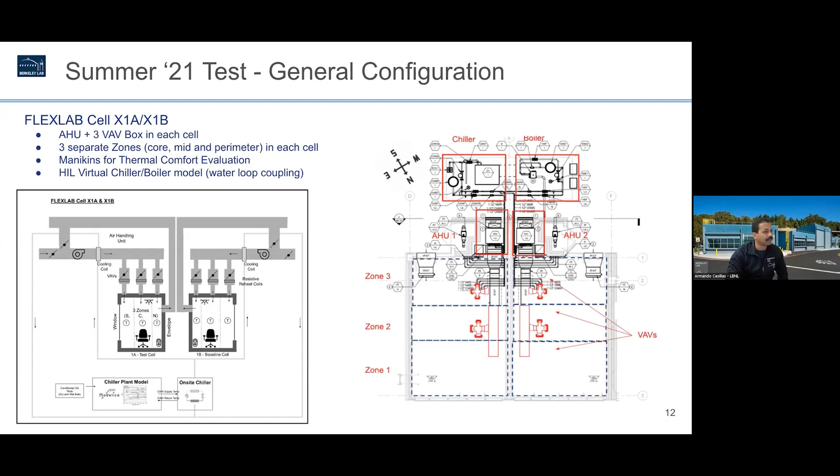So this is the first of two projects I'll be talking about pretty heavily. One of them is this HP Flex project, where we're actually trying to develop optimal controls for heat pumps to respond to prices. Currently in California, we have this time-of-use rate where you have basically an off-peak and a high peak.

As we start developing these pricing mechanisms, we'll shift eventually. We're hoping to shift to more dynamic pricing over time. So this is one way that we're making these systems more grid interactive, and grid interactive can be many things depending on what you want to optimize for.

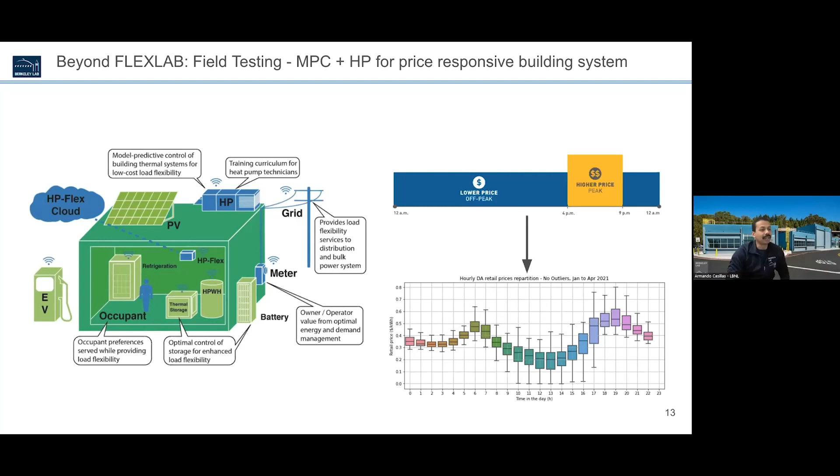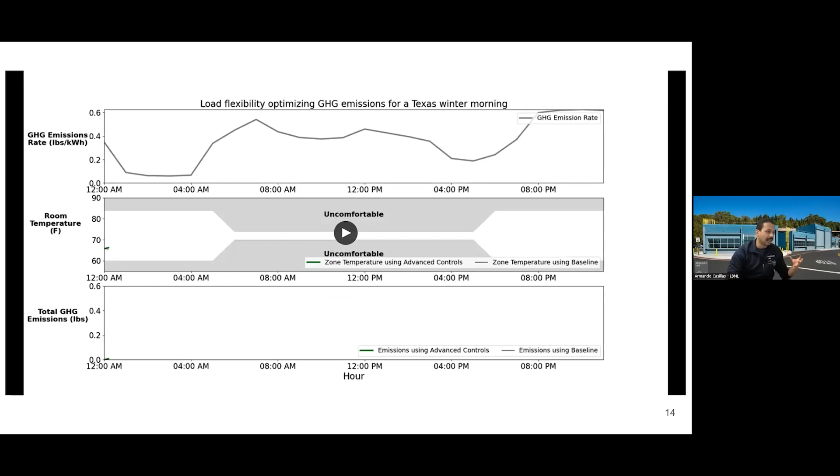So as you see here, I'll play it again. The system is going to preheat the building to optimize during the lowest greenhouse gas intensive time of the day, and avoid that high emissions rate later on in the morning. Whereas the baseline scenario is just going to turn on when it wants to. And what you're seeing is an over 50% reduction in greenhouse gases.

So this is just one way that our optimizer, our MPC, can provide this service. This is currently being deployed in FlexLab, as I mentioned. We have this optimizer in one cell, and the other cell we're running a baseline scenario to really quantify the savings and the benefit that this system can provide.

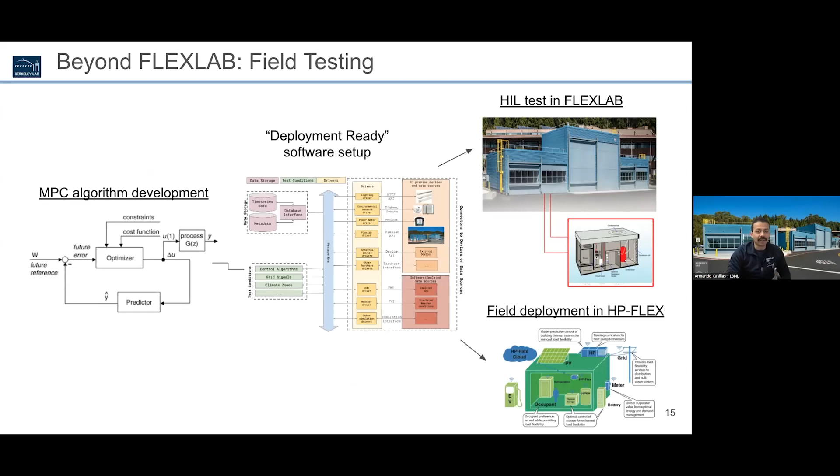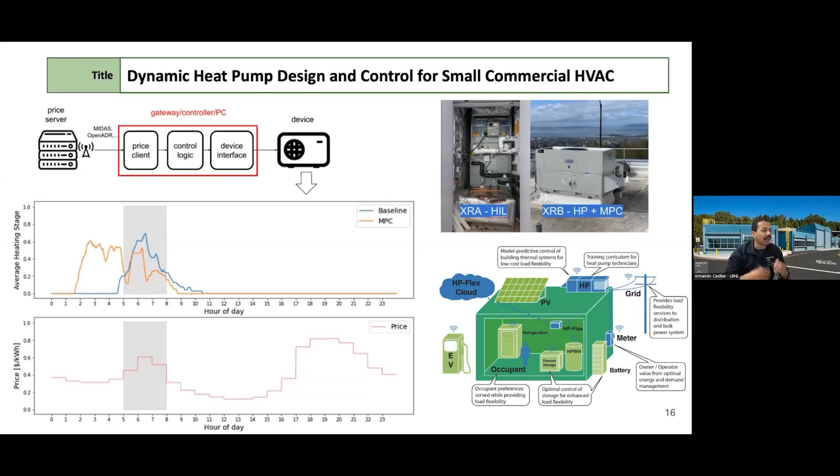This is just an example of some of the results of that. The orange line here on the top plot is the optimized controller. You see that a lot of that load is shifted away from that peak time, and we're actually able to show this very well in our FlexLab facility.

I know I have less than a minute left, so I'm just going to quickly go over this here. This is pretty exciting technology. We're going to be combining heat pumps with thermal energy storage phase change material batteries, and we've developed both a techno-economic analysis tool to determine how cost-effective these systems can be, as well as optimal controls for these systems.

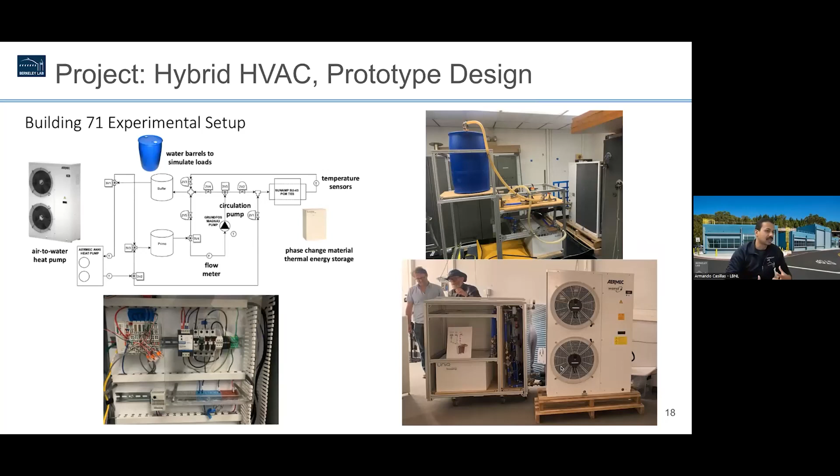This is just an example of the prototype that we developed here at the lab, combining the thermal energy storage system you see here on the lower left with the air-to-water heat pump system on the right. With these, you can really enhance flexibility with the storage provided by those phase change material batteries.

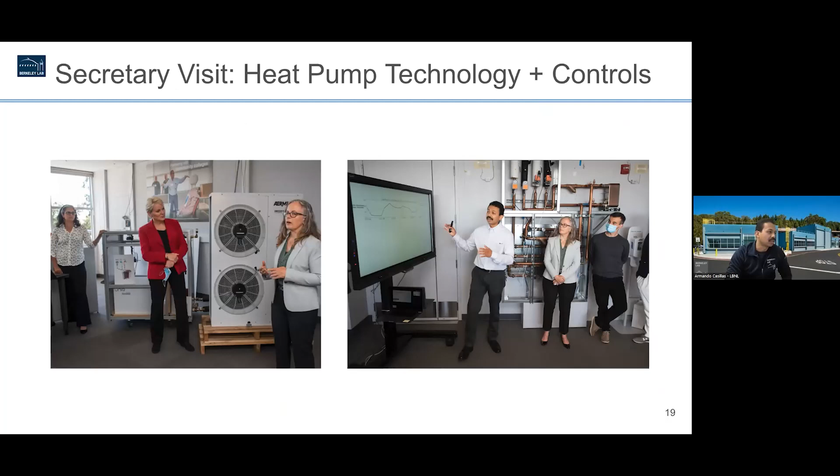Most recently, we showed this technology to Jennifer Granholm, the Secretary of Energy, and we were able to present to her some of these exciting technologies and control strategies that we're developing at the lab, all in a national context.

As you see here, we're deploying a lot of these heat pump optimal controls, 6 sites in California, as well as 2 in New York. We're also the national coordinator for the Connected Communities program for DOE, and we have about 6 out of 10 sites there that also involve heat pumps. So this is being deployed at a national scale, and we're pretty excited about this as well.

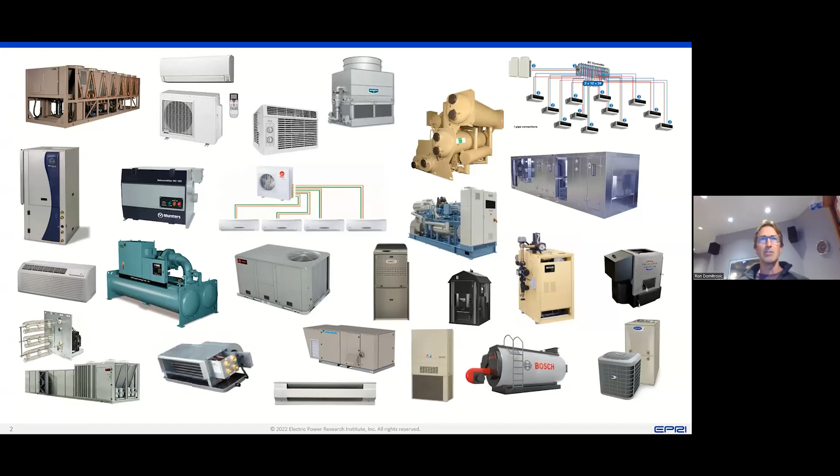You can go to the next slide now, if you don't mind. There's a whole variety of heat pumps, and even within those varieties, there are specific different types. So there's some that are appropriate for apartments and houses and commercial spaces and tall buildings and industrial facilities and so forth.

It's very important that when you embark on trying to electrify whatever you're electrifying, be it residential spaces or industrial spaces, et cetera, that you have an understanding of what the different types are and how they apply to different situations. And so that's one of the most important educational activities that we partake in at EPRI in the heat pump and electrification space.

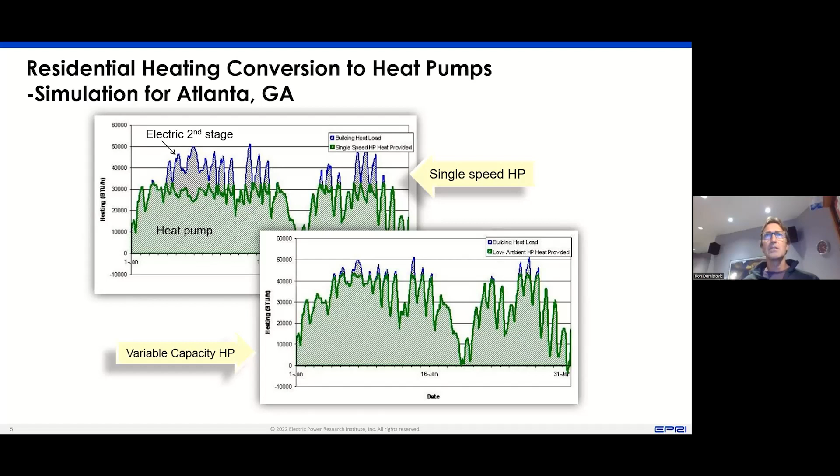So variable capacity systems are now all over the markets. I would imagine that in Alaska, that's probably the majority of what's being put in, given your very high lift conditions, very high temperature lift conditions. But...

But it does another thing, and it uses something called vapor injection. Why is that important? That's important because several people had mentioned earlier that efficiency degrades. Capacity and efficiency degrade as the temperature lift increases. The temperature lift is the temperature from the outside versus the temperature you want to get to on the inside. As that gets bigger, it gets harder to produce capacity, and you produce that capacity less efficiently.

So the inverter drive helps with capacity, but in order to help with efficiency, they do something called vapor injection. That is a way of cooling the compression process as it's happening in order to make it a more efficient process. The reason efficiency degrades as temperature lift goes up is because of that compression process - it's a nonlinear process. As you get to higher and higher compression ratios, trying to get to higher and higher temperature lifts, each unit you go up costs you more and more energy. By using vapor injection, you can kind of cheat the system a little bit and gain back a bit of efficiency.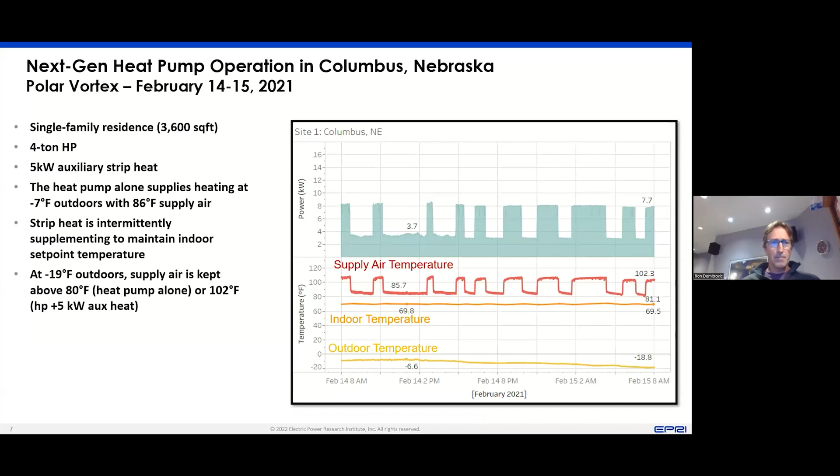I mentioned - oh good, this one isn't here. I wasn't sure about that. This is a quick insight document that EPRI produced last year after this polar vortex that just discusses how systems behave in extreme temperatures. You're welcome to download that and look at it and read it, and I can certainly send the link at a future time, or after the meeting.

And then I'll go one more slide and then I'm done. If you would, please.

I mentioned the lift, and others had talked earlier about the difference between air source systems, water source systems, and hydronic systems. The most difficult nut to crack is air source hydronic heating, because you're going from the coldest outdoor temperature to the hottest indoor temperature. Gas-fired hydronic systems often need to produce water in the 160-degree range, so that's the hardest heat pump to develop, but there is technology under development for that.

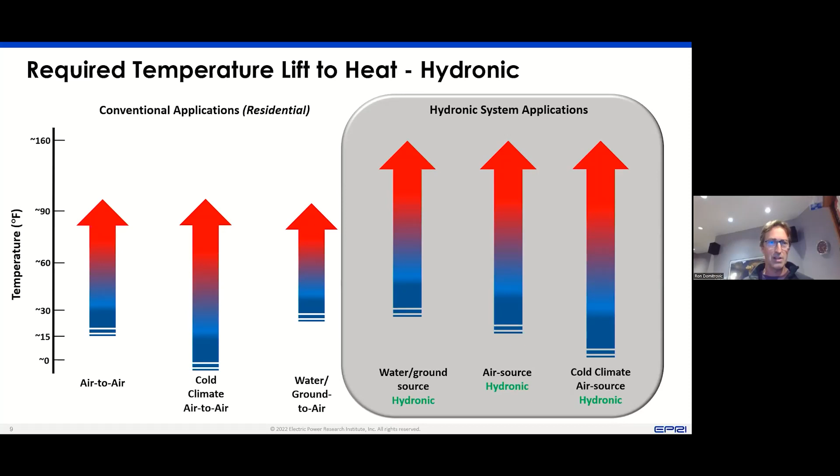One more slide and then I'm done. Danfoss, a compressor and component manufacturer, has something called an oilless centrifugal compressor specifically for high lift applications. This would be for larger systems, centrifugal, up to maybe 400-ton type systems for commercial buildings, schools, campuses, etc. This kind of technology is finding its way into products by Smart Chiller Group, Multistack, and so forth, attempting to crack that nut of very high lift hydronic systems.

So, a lot of development. I wish I had a little bit more time, but thank you very much for your attention, and happy to answer any questions either via talk or chat.

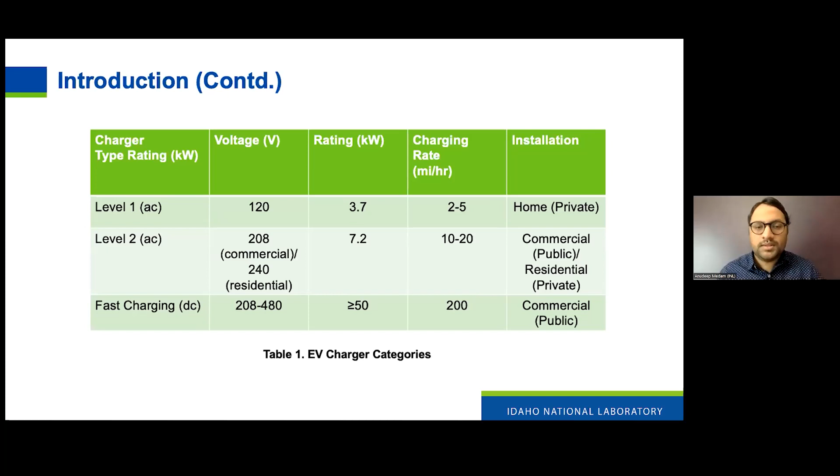With this, also the penetration level increasing, we need around 330,000 charging stations by 2035. So with so many charging stations, the load is definitely going to increase on the grid, and this would be around 10% by 2035 and 38% by 2050.

So this is a load which is unpredictable compared to other loads that we usually have, let's say HVAC or the regular housing load that we have. But with electric vehicles, the problem arises when there is no schedule of when a car will be charged or discharged. So that is one of the concerns. As well as the current grid, which has been built decades ago, and there has not been much of an upgrade, so it is not designed to handle this much load right now.

So this will cause overloading of the feeder. You will have harmonics, you will have degradation of the transformers. You will have to upgrade the transformers for them to withstand the large current and voltage.

So with this as a background, the other part is we are also looking at net zero carbon emissions, right? So many of the utilities and some of the states have already pledged that they would want to be 100% clean electric. This also has an impact on the grid where we are not sure if any additional load will be able to be satisfied by the renewable sources, because it's not easy to just get an additional load when, with the renewable sources, one of the issues is its predictability. It is not guaranteed. So we need something of a base system where we know this is the amount of load that we have, and then we can continue with it.

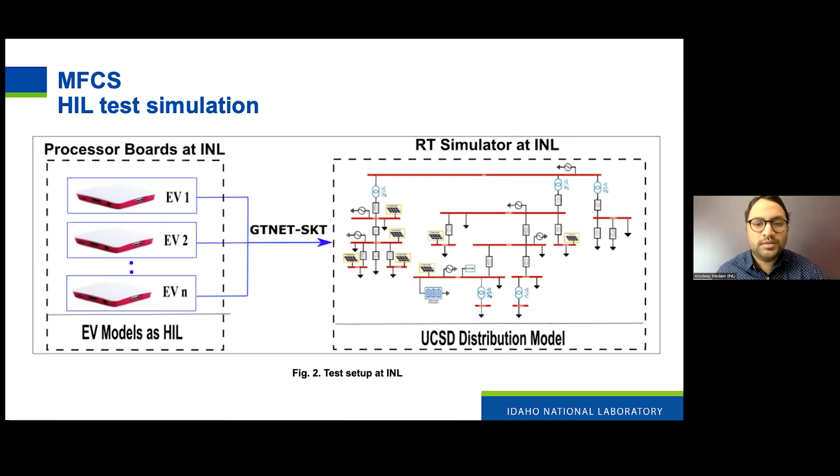So we did 2 different use cases. One is called a grid connected use case, and one would be the islanded case. In grid connected, we are looking at a total EV charging capacity of around 6 megawatts, and the DERs which were already present in the campus were able to provide up to 85% of the energy needs. For the most part, the system is usually stable, but what we are looking at is if we have to upgrade, where are the locations at which you can possibly upgrade.

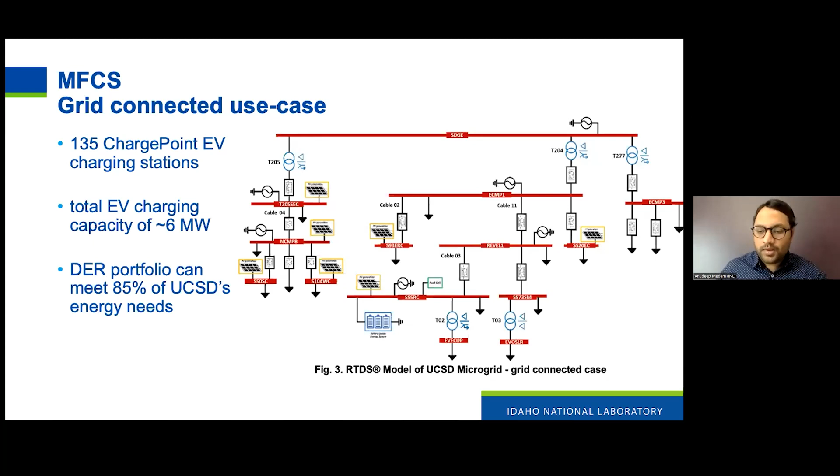In the islanded use case, this is the main part of our project, where we are looking to see if this fast charging station can act as a microgrid. We have only considered one of the feeders, not the whole feeder system, and the total EV charging capacity was around 4 megawatts. For each of these 2 use cases, we have a baseline scenario, looking at the existing data available at that particular location, and we have the infrastructure upgrade where we are upgrading the chargers as well as the solar PV we are adding. The main aspect of our testing was to make sure that whatever XENDEE designed in their platform, we were able to validate, and the basic load flow analysis results are within the 5% range.

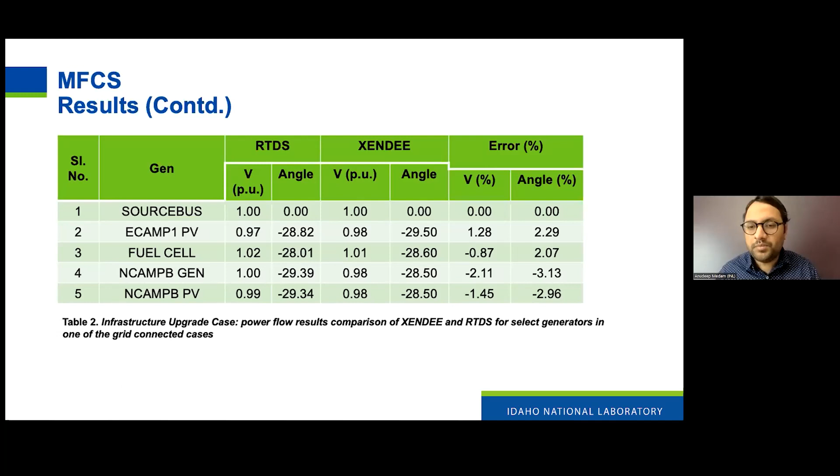And I think this is one of the main graphs. I'll be fast. So one of the test cases we did was to see what happens if there is an extreme load increase on the grid.

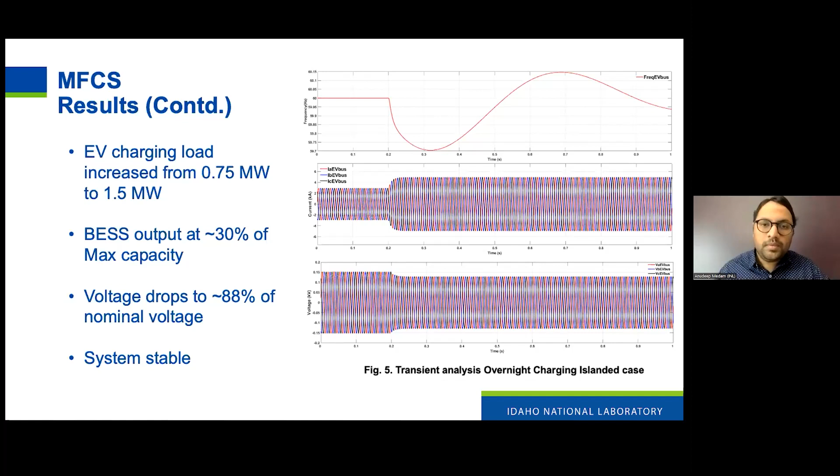At the top you see the frequency response, which has fallen a lot, and the current has increased and voltage has also reduced. The issue was the under voltage frequency, which is pretty close to the 1547 standards where you're within the range. But the positive is that the system was stable pretty soon.

In conclusion, I'll skip considering the time limit. The only consideration is that a fast charging station can act as a microgrid, and we have performed several different extreme use cases and seen that the system has been stable.

For future work, we are looking at communication protocols for vehicle to grid or vehicle to building, and the impact of having different renewable sources, like hydropower. I'm also part of the IEEE 2030.13 working group with private and national labs and other non-profit organizations, looking at how to standardize the protocols we'll be using for communication. I think I'm already over time, so thank you.

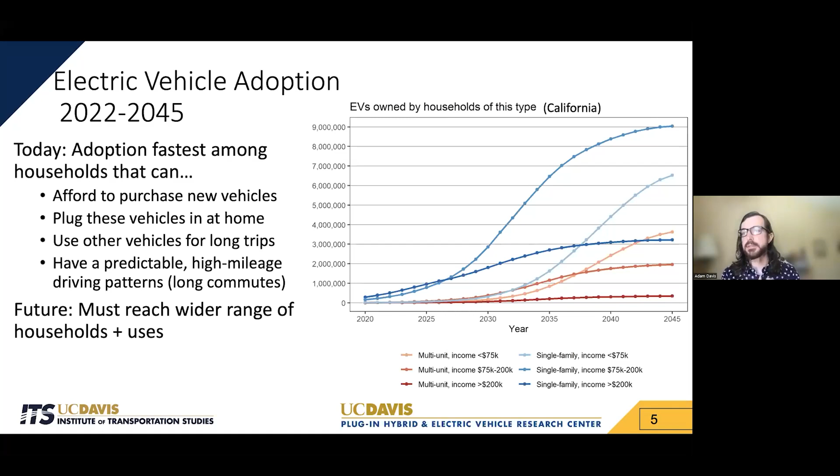DC fast chargers are a separate deal. Because you can charge a lot more for them, they're something more companies are looking into installing without direct government support.

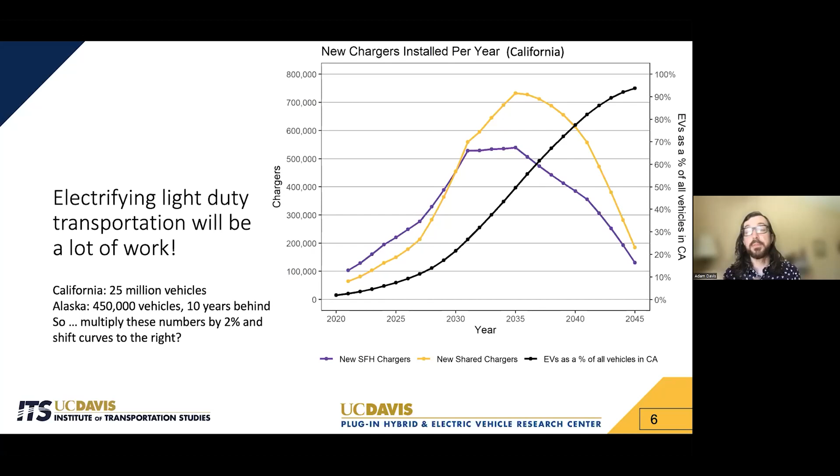The amount of installation effort needed in a place like Alaska will be a lot lower than in a place like California. You also have the opportunity to spread it out more, because adoption will happen a lot slower. In California, we're trying to reach something like 100% of vehicles on the road in the next 15 to 20 years. In other states, you've got more opportunity to plan ahead, which will generally make it a lot cheaper.

It's also really important for TNCs like Uber and Lyft — places with a lot of miles in a day heavily use DC fast charging. So far, electric vehicle infrastructure planning has been on the order of $1 to $10 billion investments from the federal government, and smaller investments from state governments. But if we're trying to hit 100% of vehicles on the road being electric, the actual costs of this transition are going to be much, much higher than that.

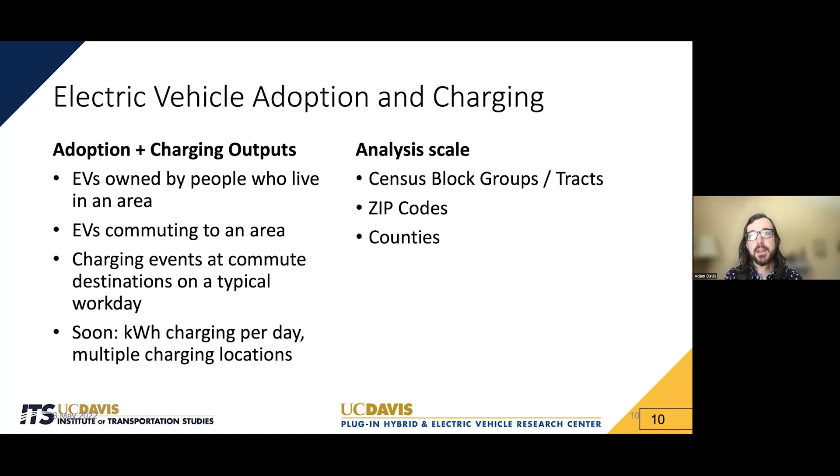We developed a few baselines or target scenarios for EV adoption, specifically for work we did in the Delmarva Peninsula and South Carolina.

These scenarios are basically 2%, 10%, and 25% EV fraction, meaning the share of all vehicles on the road that are EVs. So we're going from about 2%, where California was a couple of years ago, to about 10%, where California will be in a couple of years, and up to 25%, roughly where California should be around 2030. These are future targets, but fairly believable ones. The low adoption scenario should apply to about 2030 virtually everywhere in the country.

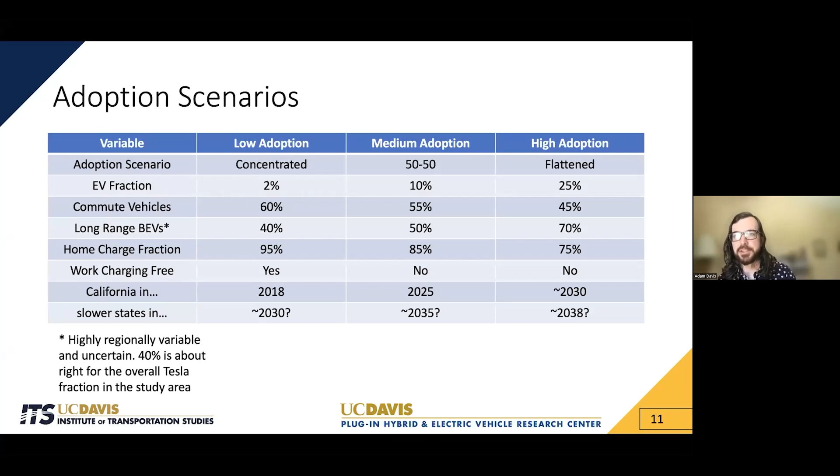Long-range electric vehicles are already becoming more common and will continue to. Long-range BEVs, battery electric vehicles with over 200 miles of range, historically just meant Teslas, but now the Chevy Bolt and almost every new battery electric vehicle introduced has more than 200 miles of range. Home charging access is also going to decrease as more electric vehicles are purchased by people in multi-unit dwellings, and more multi-EV households may not be able to charge all their cars at home at once.

The way this tool works is you first select a geographic layer of analysis - in this case zip codes, block groups, and counties - then adjust the scenario parameters. You can select the low, medium, or high scenario, or adjust individual parameters, like a different commute fraction, different availability of long-range vehicles, or different access to charging at home, and see the impact on both the number of electric vehicles and charging demand.

Once you've developed a scenario, this tool lets you export the results into a CSV. The main idea is that you can test a wide range of scenarios and plug them into whatever analysis models you have, for going from number of charging events or kilowatt hours to figuring out how to allocate the electricity, or figure out costs.

So this is basically a tool that we developed for California and other states. We're working on expanding it right now, and it's an ongoing development process. But I also thought I'd end by...

Talking a little bit about what makes Alaska possibly challenging for electric vehicles. The list of cons here is probably fairly familiar to all of you. First off, it's very, very cold there, or more often cold in Alaska than in the lower 48 states. Electric vehicles generally perform worse in cold weather.